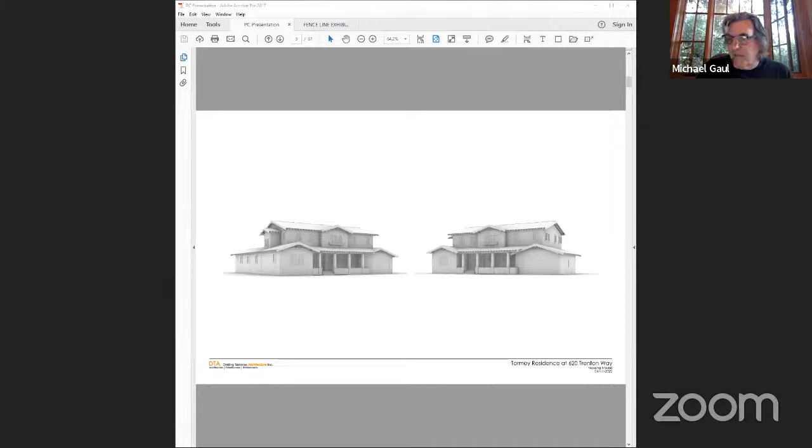Let the record note that all commissioners present have visited the project site. Can we have a staff report, please?

This is an application for design review for a first and second story addition to an existing single unit dwelling at 620 Trenton Way, zoned R1. With this project, the floor area would increase to 3,304 square feet, where 3,308 square feet is the maximum allowed. The number of bedrooms in the main dwelling would increase from 3 to 7. The office, study, and playroom all qualify as potential bedrooms for parking purposes. 3 parking spaces, 2 of which must be covered, are required on site. 2 covered spaces are provided in the existing attached garage, and 1 uncovered space is provided in the driveway. All other zoning code requirements have been met.

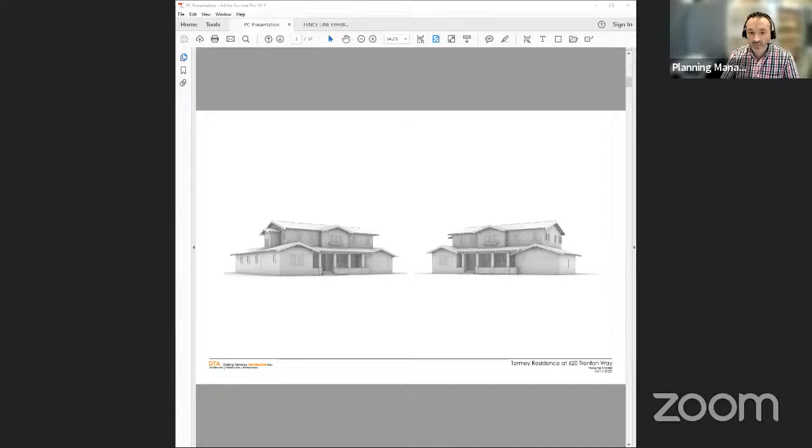At the Planning Commission Design Review Study meeting on June 13th, the Commission had several suggestions regarding this project. The applicant submitted a response letter dated June 15th and revised plans date stamped June 21st to address your comments. Suggested findings for design review are provided on page 3 of your staff report. At this time, I'd be happy to take questions of staff.

Thank you, Ruben. Are there any questions of staff? I don't see any hands, so I'm going to open the public hearing. Would the applicant please come forward and state your name and anything else you would like to add about your project? I'm bringing in the applicants as we speak, so just give me 1 second.

All right, go ahead, Ted. Hi there. Thank you, commissioners, again for hearing this project this evening. We appreciate all the comments that you gave at the last meeting, at the study meeting, and we've made a few revisions to address those.

So we've revised the facade in a few ways. We remembered your comments about the massing of the second floor addition, as well as the scale of the front porch in comparison. So we raised the porch roof to reveal more of the front porch and the front facade into the kitchen with those windows on the first floor.

And then we also really appreciated the suggestion to add shutters, and so we've added shutters to windows where possible. So all of those on the second floor on the front facade, we've added shutters to help break up a bit of the heaviness that the second floor was having before, as well as added a planter box at the center gable. And we've also increased the size of the gable vents, again to reduce the heaviness that the second floor addition had at the last meeting.

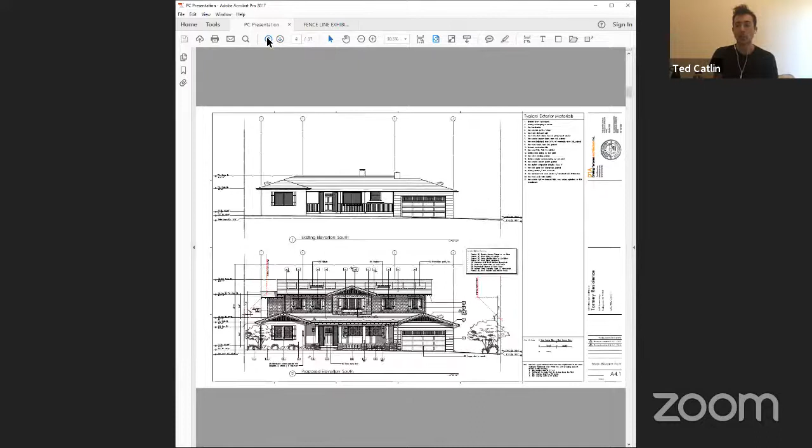And we also submitted an additional 3D rendering, just to give a little additional context to how this will look from a street perspective. And this is with those updated porch heights and some of the additional articulation at the window treatments.

And we made a few minor revisions that weren't in response to comments, just things that we noticed with our CAD software, so we included those in the letter. But we hope that this addressed some of your concerns that you had raised, many of which we agreed with, and we'd be happy to take any questions or comments.

Thank you very much. Do any commissioners have questions for the applicant? No. All right, then is there any member of the public who'd like to speak on this item? Okay, I'm not seeing any, and we don't have any other public comment emails either. Okay, then I'm going to close the public hearing. Commissioners, anyone like to comment on this project?

Commissioner Tse? Yes, thank you. Yeah, I wanted to just, wait, I'm sorry, we're in comments now, right? Yes. Okay.

I just wanted to thank the applicant for listening to our comments and addressing them. I think that this rendition is beautiful. It's addressed all of our concerns. That upper floor fits much more nicely against that first story. And I appreciate the added detail with the shutters on the windows upstairs. It's a befitting location for them on the second story.

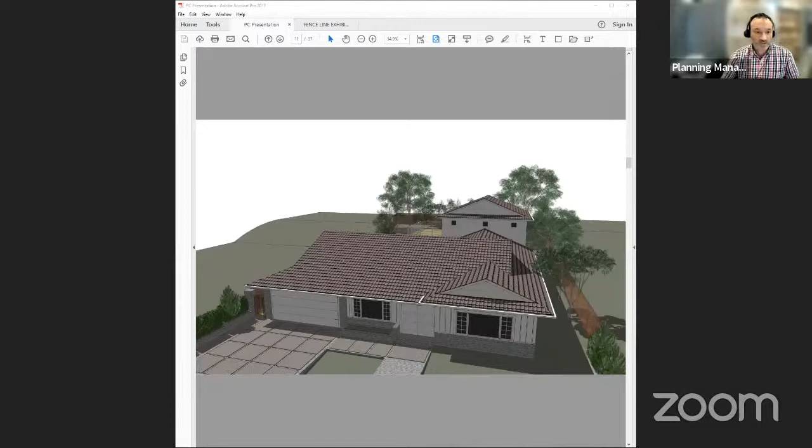Yes, this is an application for design review and hillside area construction permit for a first and second story addition to an existing single unit dwelling at 1829 Sebastian Drive, zoned R1. The applicant is proposing a first floor addition at the rear of the house, which includes a 210 square foot loggia, a new second floor addition with a second floor deck located above the loggia. The proposed house would increase in floor area to 3,699 square feet, where 4,083 square feet is the maximum allowed.

The subject property is located within the Hillside Area Overlay Zone. View preservation shall be limited to obstruction of distant views to San Francisco Bay, the San Francisco Airport, and Mills Canyon from primary indoor living areas such as living rooms and family rooms. Planning staff would note that the special permit requirement for second floor decks, the limit of 75 square feet, and increased side setbacks do not apply to lots located within the Hillside Overlay.

With this project, the number of bedrooms would increase from 3 to 5. The proposed den on the second floor counts as a bedroom. 3 parking spaces, 2 of which must be covered, are required on site. 2 covered parking spaces are provided in the attached garage, and 1 uncovered space is provided in the driveway. All other zoning code requirements have been met.

At the Planning Commission Design Review Study meeting on May 23rd, the Commission had several comments and suggestions regarding this project. The applicant submitted a response letter dated June 12th and revised plans, date stamped June 16th, to address the Commission's comments. The applicant also installed story poles to show the outline of the proposed second story addition.

Suggested findings for design review and Hillside Area Construction Permit are provided on pages 3 and 4 of the staff report. Planning staff would note that a received-after item was submitted by Christine Lee, which was provided to the Commission prior to tonight's meeting, so you should have that before you. There are also several other letters from neighbors included as attachments to the staff report. Those were submitted in time for the packet, so they are attached to the staff report. At this time, I'd be happy to take questions of staff if you have any.

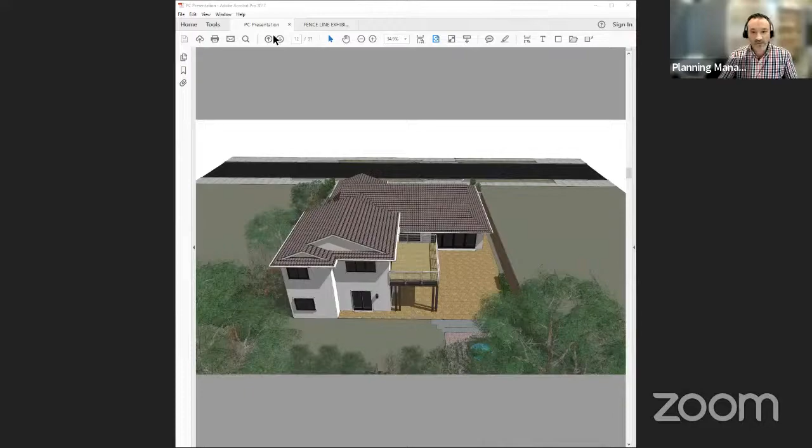Ruben, for properties in the hillside area, we know that we generally approve decks where one can enjoy and appreciate the bay views from a second story. Does the same thing apply when there's no view of the bay from the deck?

At the time the zoning code was amended, it was generally agreed that lots in the hillside overlay area would not be subject to the deck requirement of the special permit limited to 75 square feet. This was primarily based on the fact that a lot of the lots in that area slope downward or upward, and that's the only way they can get a flat area on those lots.

So that's part of it, and part of it was because many lots in the hillside area do take advantage of views with the use of decks. That's not to say that every lot is in that situation though.

So while there may not be a requirement for a special permit or a way for you to limit the size by code, I think in cases where the lot is flat and there aren't any downsloping grades, or perhaps there aren't any views to take advantage of, you can consider reducing the size of a deck.

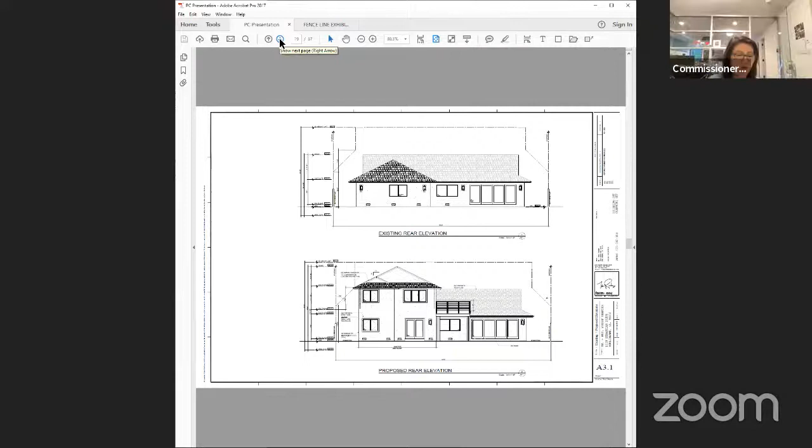And you're providing some shade, I suppose, under the lower floor. I think what we're gonna do is create a planting ledge in front to give some relief to the neighbors. And we'll maybe just go out 6 feet with the deck, 6 by however wide it is, and create a planting ledge in front of the railings to help the privacy of the neighbor on the left. Yeah, that could help, and reduce the noise too. Yeah, exactly.

It's just an added feature for the backyard with the fireplace and kind of that central courtyard of existing landscaping. Okay, yeah, I get that.

I also wanted to share with everyone that after talking to the two neighbors on Sebastian on either side, there was concern about the accuracy of the survey. So I reached out to the surveyor I work with, Kevin McGuire, and he was very kind to immediately check his work again. He spent the afternoon and checked it, and it came out accurate. He created a fence exhibit, stripping away some of the noise on the survey, cleaning it up to provide information that could be of assistance for you, Tim, in communicating with the neighbors.

Yeah, we really want to keep this out of this. This has nothing to do with it. This is a neighbor thing. Commission should not be getting involved in fences.

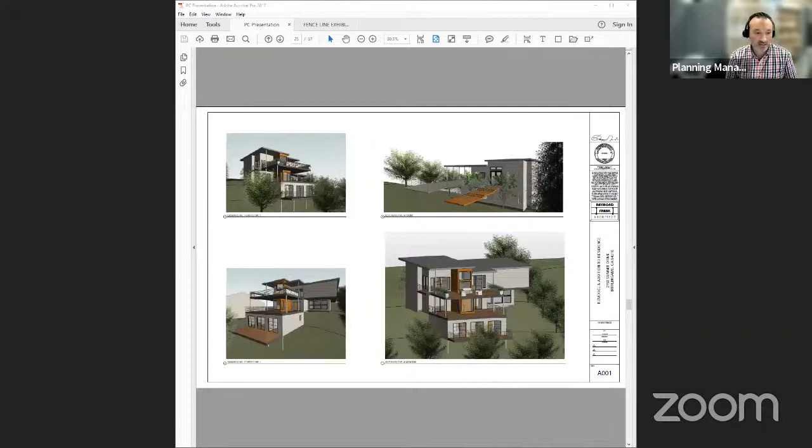There were several items received after submission by Faith Chan, the next door neighbor, which were provided to the commission prior to tonight's meeting. Staff would note that the project planner did reach out to Ms. Chan this afternoon and provided clarification to her points in the email. Ms. Chan seemed to understand that the setbacks and property lines shown on the plans are now correct.

And at this time, I'd be happy to take questions of staff if you have any. Thank you, Ruben. Does anyone have questions of staff? I don't see any hands, so I'm going to open the public hearing.

Would the applicant please come forward and state your name and anything else you would like to add about your project? You're still on mute. You're muted. Mr. Frank. Sorry about that. There you go.

Okay. Hi again, my name is Raymond Frank. Thank you again for your time, and thank you for your comments and suggestions from our last meeting. We were able to make some adjustments to the project based on the observations from the commissioners, including Commissioner Pfaff regarding the railing design. The homeowner also really likes the existing pipe railing, so we've decided to remove the glass railing from the project completely and keep the pipe railing design at the front of the house, and also incorporate it into the new decks at the back of the house.

We also made note of the observations regarding the preservation of the views from around the decks in the back, and as such we've stepped back the main level deck by 3 feet. We've also incorporated planters at the side railings to help beautify and soften the view from the side. It's not shown on this plan, but we plan to have the planters both at the main level and also at the lower level directly below.